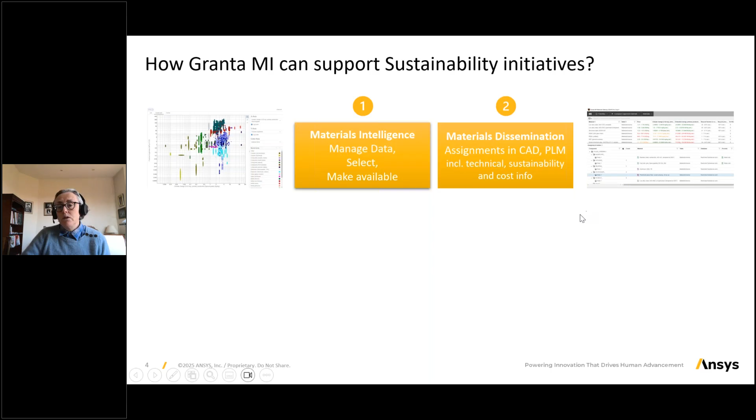Then I will go into eco-design. So how can we help with the simple assessments of different designs, so you can do what-if scenarios early in design. And then we'll go into optimization.

How can we look at loads of different designs and take sustainability as one of the criteria we try to optimize on. So this is what I will cover in 4 steps. So starting with materials intelligence.

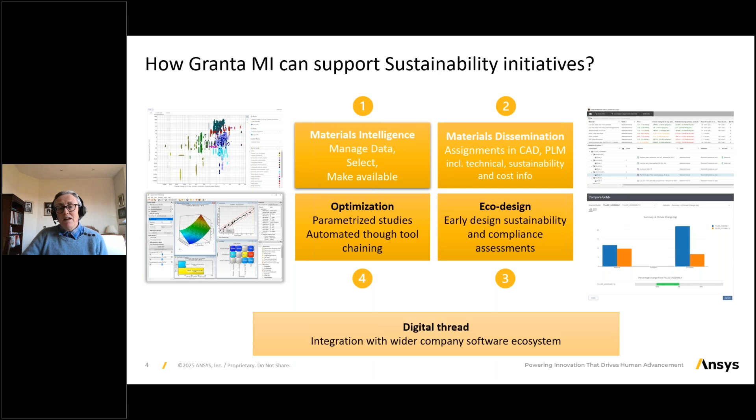So just to show you what I'm talking about today is a tool called Granta MI, which is a web-based tool. So companies normally install it on an internal server, and they use it to capture some proprietary information. So some of it could come from testing for performance of the materials. It could come from the supply chain for sustainability data, or restricted substance data, or price. Loads of different places where this data comes from, but basically what you're trying to do is you're trying to have a simple way to capture this data inside your company and make sure that it's reused.

This data, for some, especially for sustainability and the restricted substances, there may be gaps. The supply chain may not have all the information that you require. And for this, we can provide some backup data, which gives you some information on lots of different materials.

And then when you have this information, we help you link it to your simulation tools, to your CAD tools. We have some environmental assessment tools and restricted substance assessment tools, but you could also use it to do some predictions using AI ML, and you can link it to anything else using our REST API.

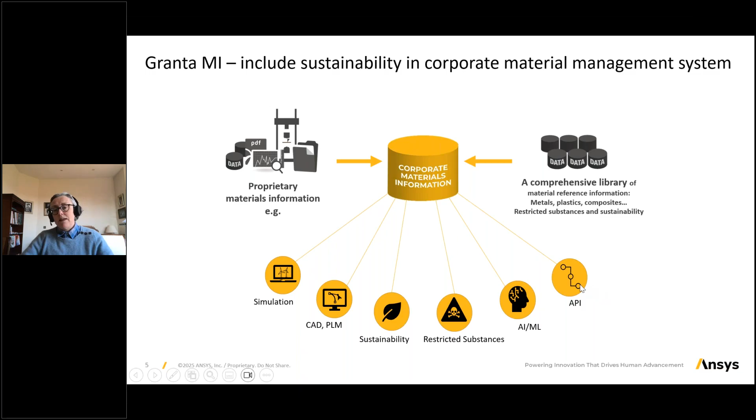So the idea is to create one platform shared between everybody who needs information within the company. And when it comes to sustainability, to make sure that the people who are experts in design and simulation and product development can take into consideration the company's goals when it comes to sustainability and restricted substances. And this can happen with experts from this field, feeding them the right data and the tools to help them make these decisions.

When it comes to data, a lot of sustainability data may come from the supply chain, but there may be gaps, and so we can help with gap filling. When you fill your database, you may get some data that comes from your suppliers, some data that you find on the internet, or what you have tested in the past. You can assign different quality to the data that you have, so that if you're very secure on the data you've tested, it could be a high quality rating. And if you have to use some of our data as backup, you might say this is just reference data, so you may need to assign a bigger safety factor to the data that you're less sure about.

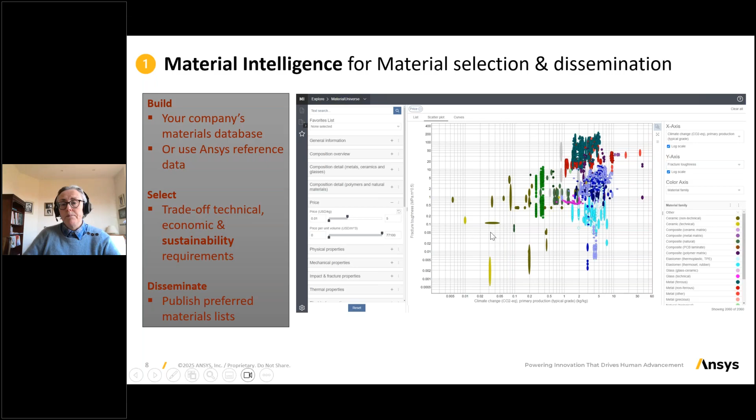Another thing that customers find very useful is building a favorite list. These can be built personally, so you can have your own list, or they can be built by the company for all approved materials, and also by project or product, so you can have easier to navigate lists.

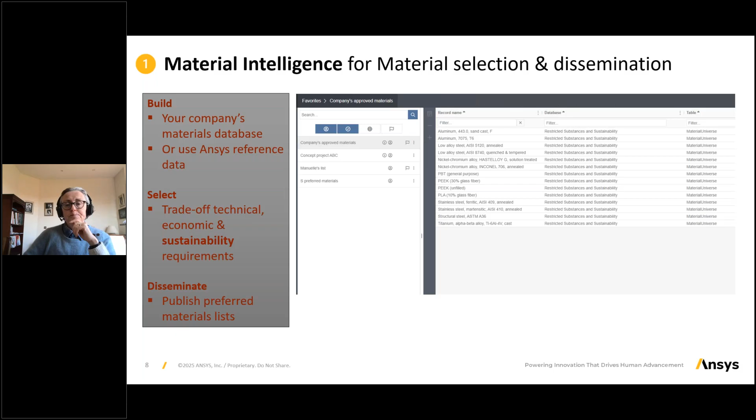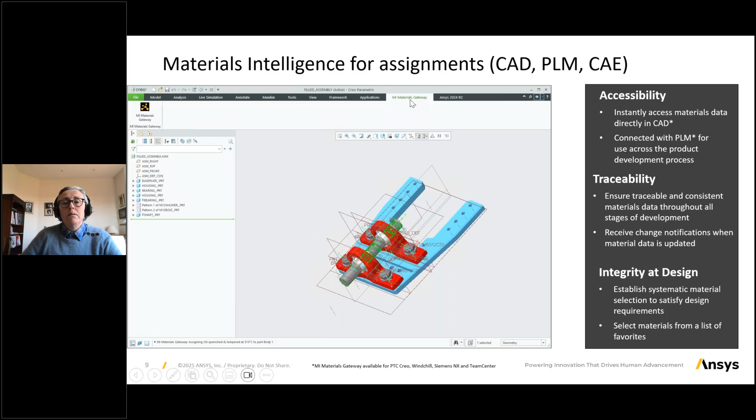Once you have this, we have plugins for most CAD and CAE tools. Here we show Creo, and within Creo you have a little plugin that we call the Materials Gateway, which you can open, and where you can see different information. At the bottom you would have your assembly and the materials that have already been assigned to the parts. At the top you would have your favorite materials. Here we highlighted information that you may want engineers to consider, such as the CO2, the price, and the embodied energy, as well as the RoHS compliance.

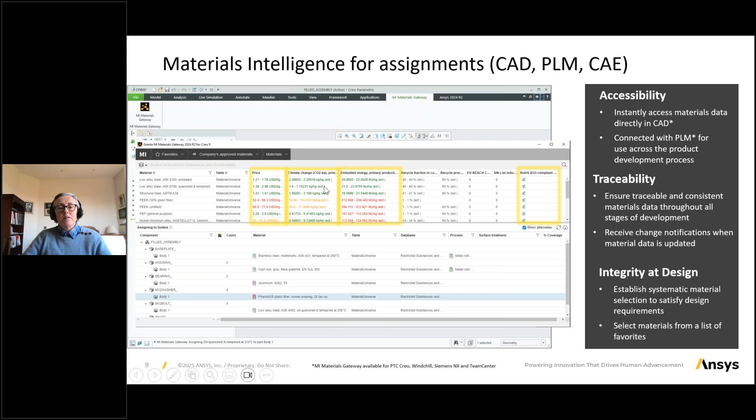You can configure this so that the columns you see are what you want, what is most important for you in design. But you can also use colors to help guide the engineers towards the materials of interest, because for some criteria it might be difficult to judge whether it's good or bad, so the colors make it easier.

So I'll now show a video of how this works. I need that.

So we'll go to Creo and then go to Windchill. Here we have an assembly in Creo, and it's a housing with an overmolding, so this would be treated as a multi-body in Creo. As we saw before, we have at the bottom the assembly, and at the top the list of materials from your favorite list. So these are my favorites, and you have different information available on these materials.

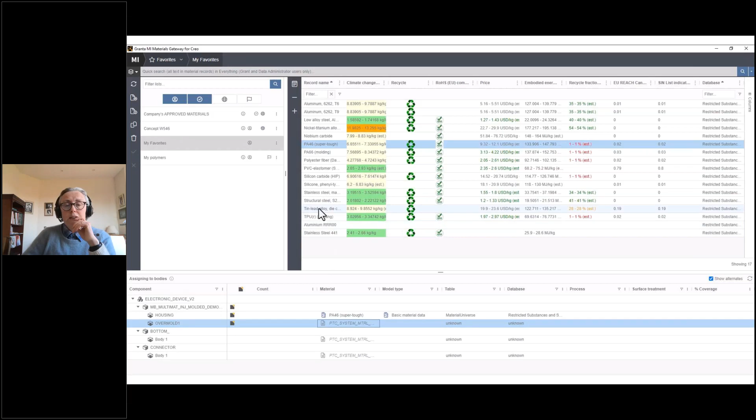So you can start either directly assigning materials to the part after you've checked it out from Windchill. When you assign materials, you can choose to just assign this basic material data, or if you need to do simulation afterwards, you can also check that you have the necessary material models to do the simulation as a follow-up.

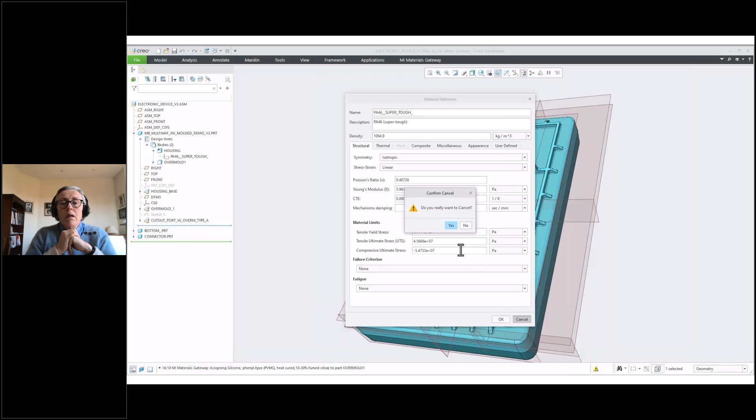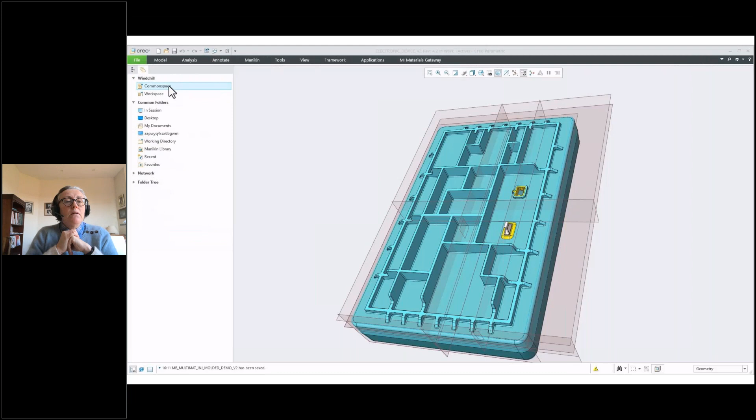So here we have assigned a material for the housing and for the overmold. You can then make sure that the data is correct - you can see what information you have on the materials, so you can check it, and then you can check it back into Windchill to make sure that this material information will then be passed on to Windchill. Within there, you can see you can check that the material information is present for that part.

You can see that within Windchill, you also have the Granta assignment, so you can see that there is more material behind this material object that has been created. And you can check where used, to see which other parts this material is also used in. So you have this very useful way of checking the impact if you have a problem with the supply chain, or if you're trying to replace a specific material. You can do it in just a few clicks, finding where it is, because you have a material object created within your PLM.

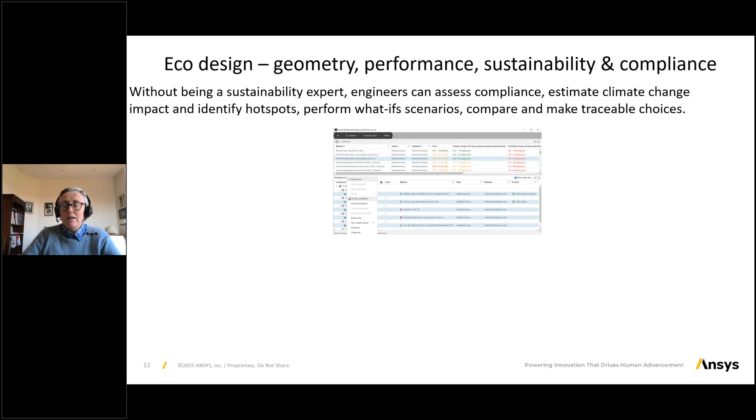Once you have this information and you have the materials assigned to all the parts that you're designing, you can then start doing some environmental assessments. Same way that you're doing some weight assessments or some price assessments, you can do environmental assessments and compliance assessments. So I will show you now a quick video on this.

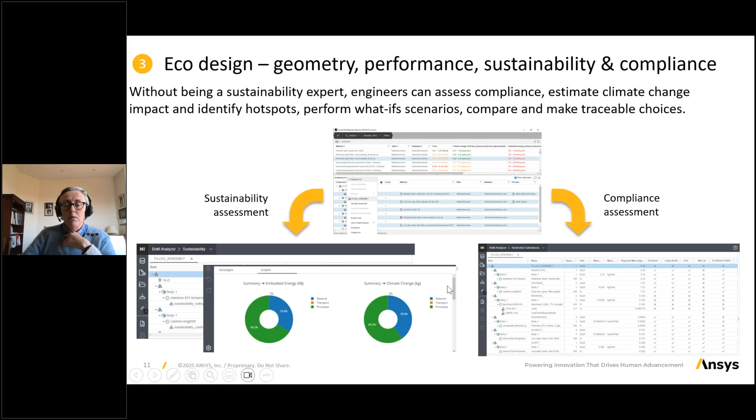So here we're back in Creo. We have different parts, and we also have the gateway open. We have the same as before: different assemblies without any materials assigned. So we can check - we can open data sheets in the gateway the same way that we can in the software itself.

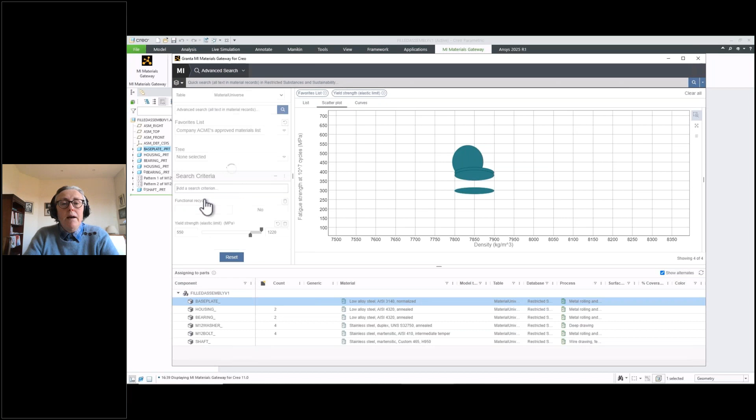We can use favorite lists, as I was showing before, and we can do some searching. We can use any of the properties available in the material cards as a criteria. We can also see the same scatter plots that I was showing you before. So here, from our favorite list, we only have 3 or 4 steels, and we can add some criteria - here we wanted to have a recyclable material with a high yield strength.

Now that we have this material, we are assigning it to the base plate.

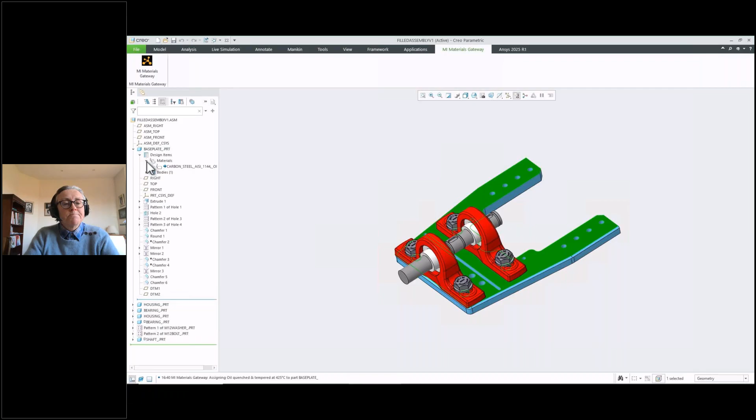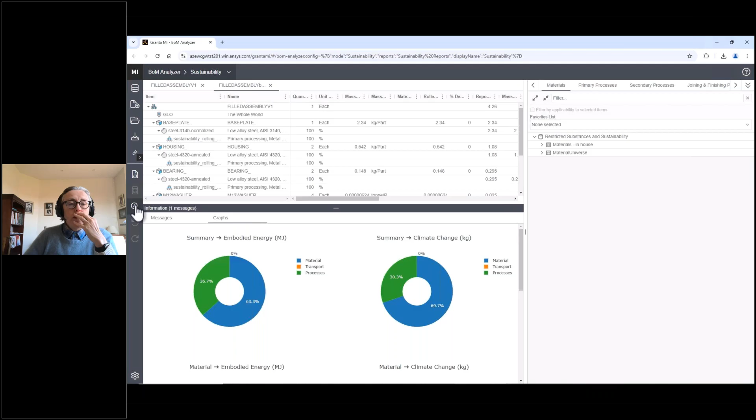And now what we're going to do from the gateway, we're going to view it in the BOM analyzer. So now we're going to analyze the BOM, and we can analyze it for restricted substances or for sustainability. So here we're looking at which materials have the biggest impact on CO2, on climate change, and we can check one scenario against another.

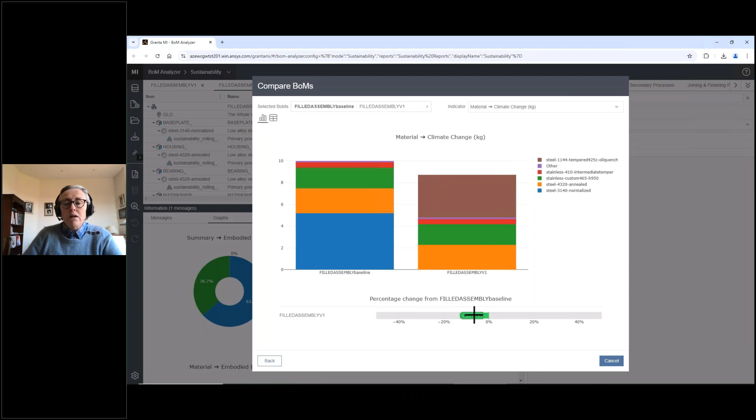So here we had the baseline, and we're trying to see whether the changes that we've made have made a positive impact on the climate change. And we can see what the impact of each material is. So I hope that was clear.

So now that we've done this - we've looked at materials, we've used them to make choices, we have assigned materials to our designs in an easy way, and we have checked the environmental impact of different designs. Now what we want to do is go further, and we want to assess lots of different designs and do a real design optimization.

But we know that we could look at the geometry of the design as a parameter to change, and we also have some technical performance to achieve. So how can we best balance performance, sustainability, and cost? So how can we do this?

So here we're going to see an example based on a truck suspension. And here we have different parameters that we can change, with different thicknesses, or width, or height.

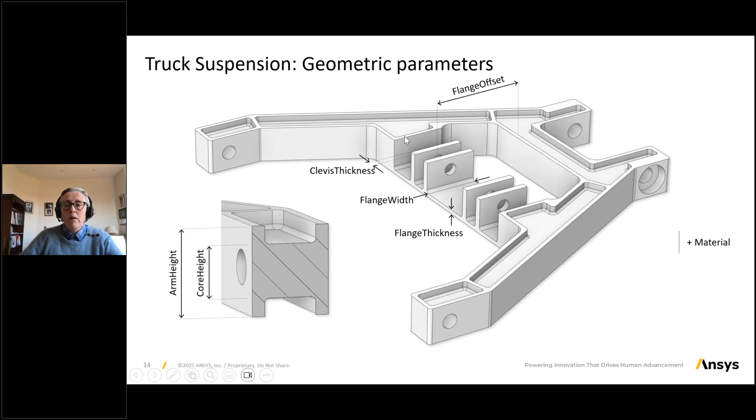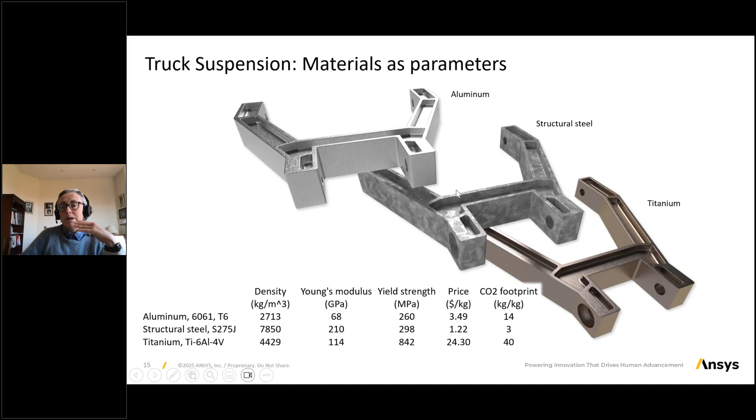And when doing a material selection, we want to look at 3 different materials. So here we took 3 quite different materials just for the purpose of this exercise, so that it's clearer. In most cases, it's rare that you go from an aluminium to a titanium, but you may go from one type of aluminium to another.

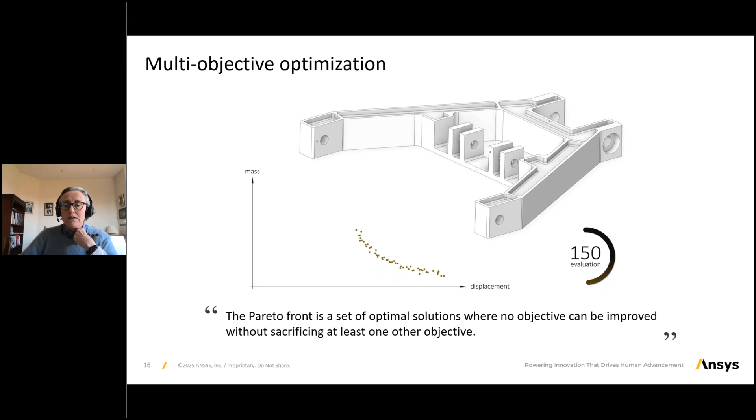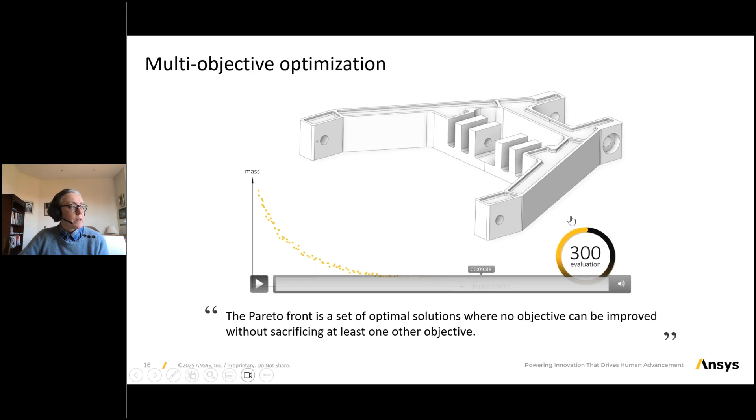And then what we are doing is automating this process and looking at hundreds of designs and combinations, each time looking at the objectives we are interested in - here we have looked at the mass and the maximum displacement. We have some simulation tools, but one simulation tool we've used in this exercise is called Ansys Discovery, because it's very, very fast simulations.

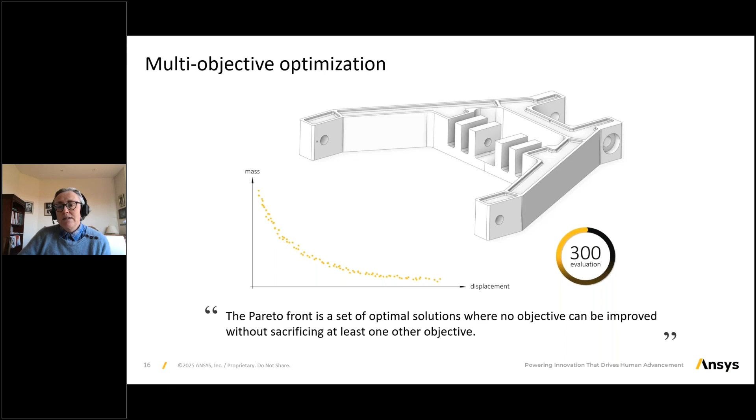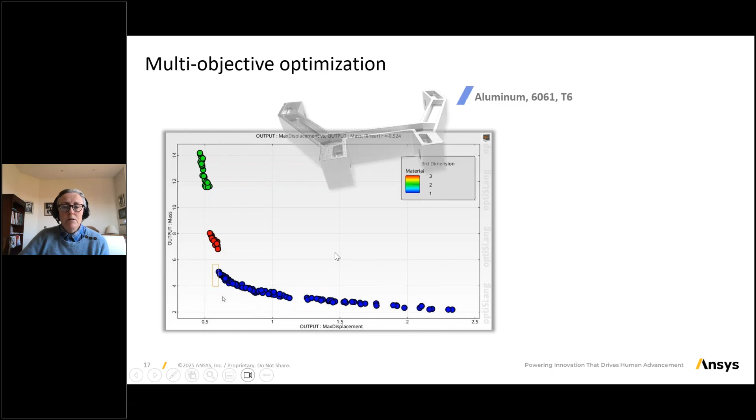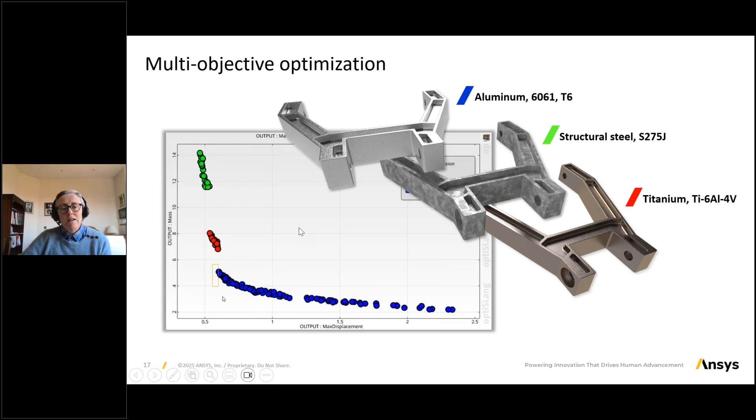So here we're going to look at each material, and each material is appearing in a different color. So in blue we have the aluminiums, in red the titanium, and in green the steel. And you can see each data point represents a specific design.

So I've got a video on this as well. I'm going to cut this sound. Here we go.

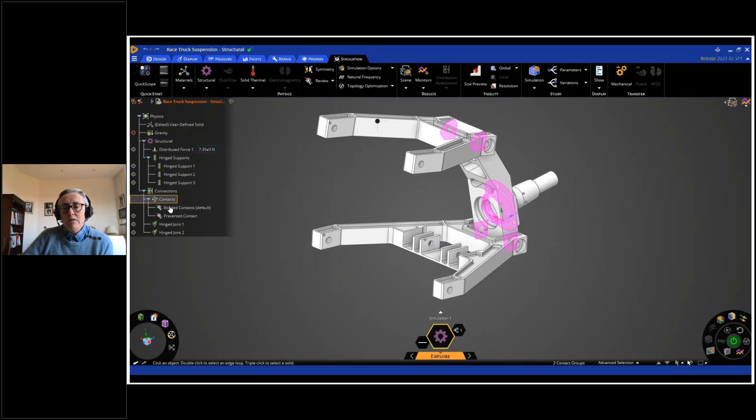So we have that truck suspension. What we have done is we have started from a CAD file, and then we have imported it into Ansys Discovery, and then we can parameterize the design in Discovery, showing which parameters can change and by how much.

Now we are opening optiSLang, which is the tool. Hold on, let me go back one second. Here we go.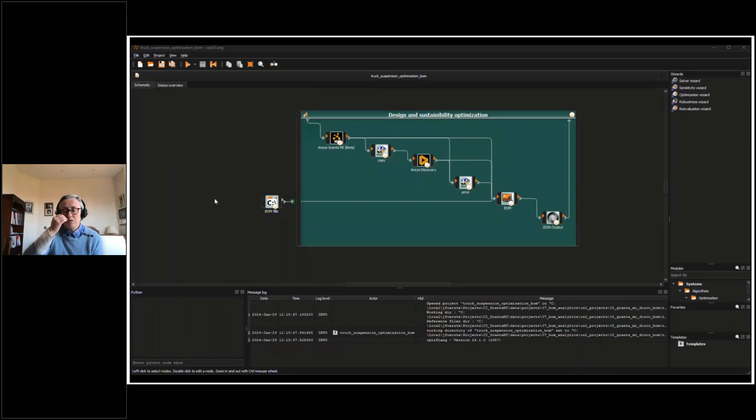In OptiSlang, this is the tool where we will set up this framework. So you can see the different steps. First is the material data, then we get the material data into OptiSlang. We do the simulation in Discovery. We do a price calculation, simple price calculation based on the materials data. And we use the BOM analyzer, like I showed you before, in Granta MI to do a sustainability calculation. And then we get the outputs in OptiSlang.

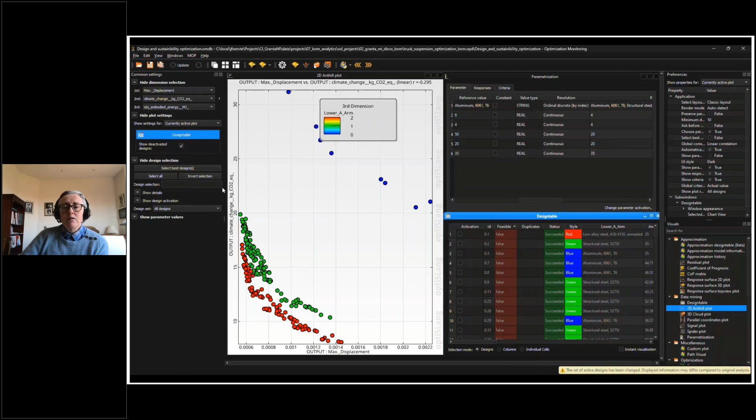So let's do this. So first we go to MI. This is Discovery. And this is OptiSlang for the results analysis. So let's do this step by step.

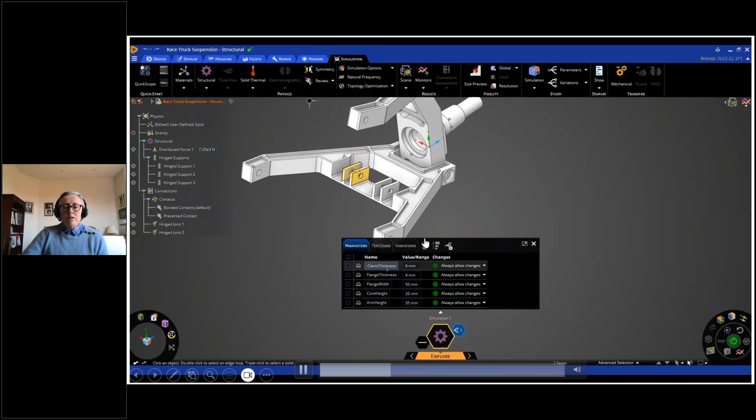And this list will be automatically imported into Discovery using the built-in node that we have for materials. So here we're going to say, okay, we have the three materials, and then we can choose which properties we want to add as well. So we have added the price in terms of export that we want to add.

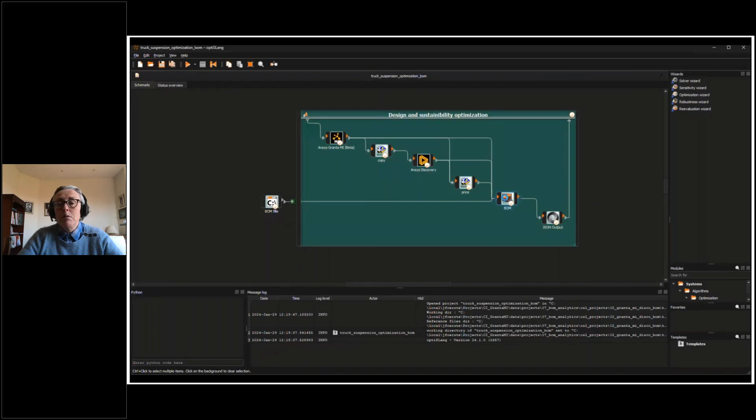And now in Discovery, we're going to choose the parameters that we want to evolve. And in green, we have the objectives or the outputs that we would like to consider. So this is the simple price calculation that will be done as well using OptiSlang, and the BOM analytics used from Granta to estimate the sustainability response. So this way we'll have the performance, the price, and the sustainability.

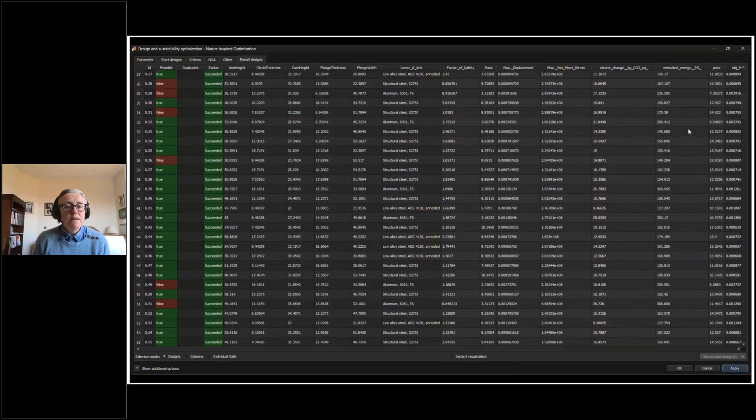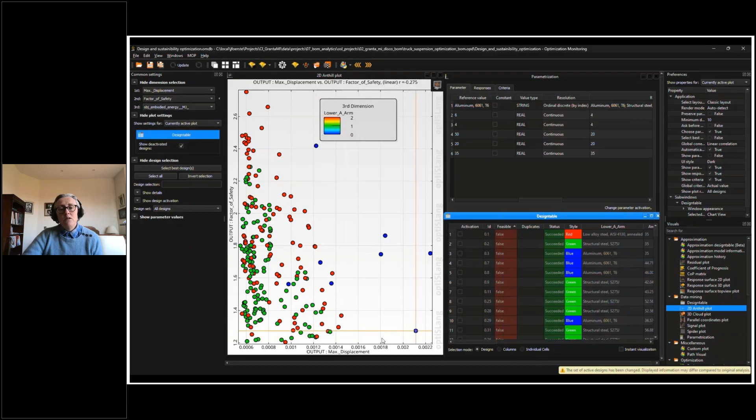And you can also see these spider plots, which allow you to see again these three different materials, the different criteria that you decided to make evolve, and the outputs you were looking for. So very quickly, you have a framework to optimize designs using Ansys tools and high quality materials data.

So this is all I wanted to cover today. I hope that's been interesting. But really, to recap, we're helping you. We're trying to help engineers consider sustainability early in design when they make material decisions, in the same way as they could consider other criteria.

To share information within a company in a very efficient way, including your own information and maybe suppliers' information, making quick evaluations of designs at the time when it doesn't cost much to make changes, and then automating parameterized studies of different designs for taking into account the environment in design optimization, with the full digital thread, both for sustainability and the rest of the material information of interest.

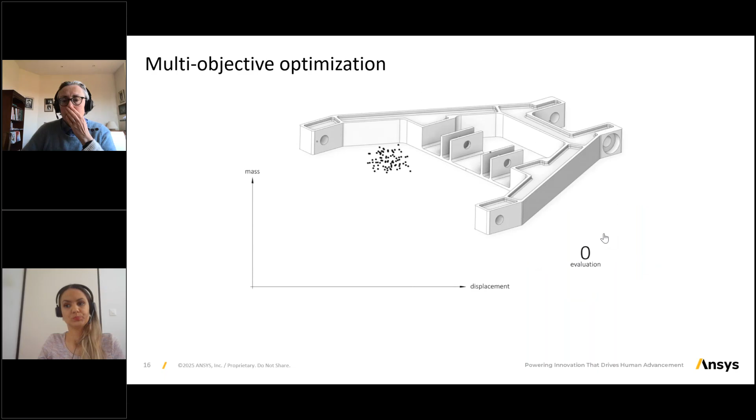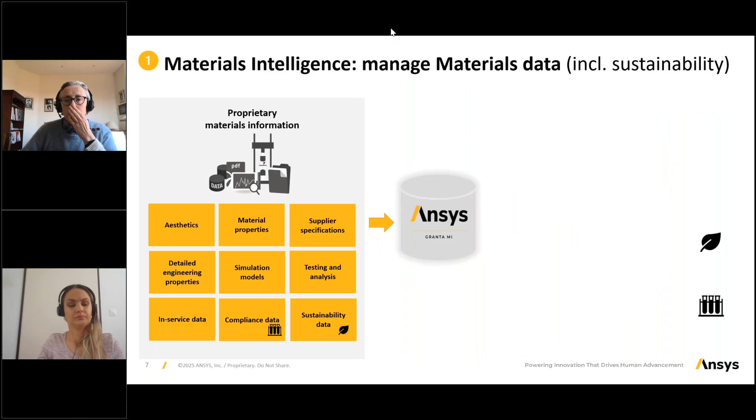Absolutely. So I'll go back to one of the slides at the beginning. As you can see, if you don't have a material in the database, you can absolutely enter your own. It can come from anywhere. You can add new materials, add new properties, and you can absolutely create and not use our materials at all, starting with only your own materials. You can do whatever you want, and it's yours. We don't have any visibility on it, nor does anybody else, unless you give them access.